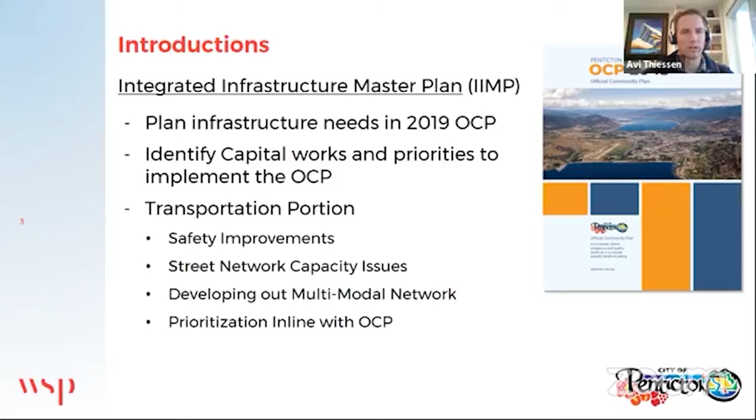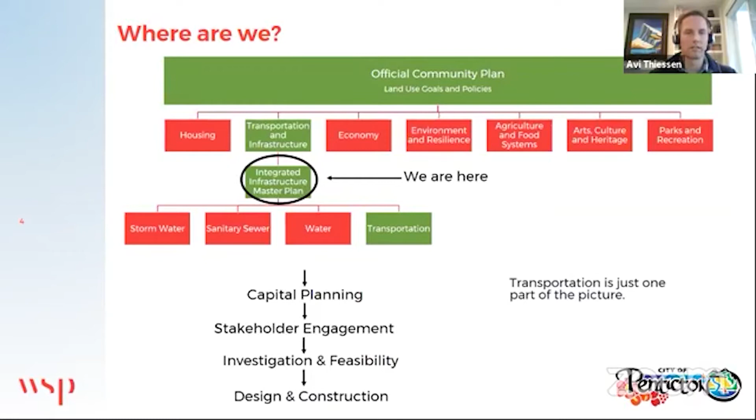For more context, the official community plan is the overarching document of how the city wants to grow. From that, several other documents or studies will be completed. This one is specifically focused on transportation infrastructure, and within that we have four main areas: stormwater (how we handle major rain events and snowmelts), sanitary sewers, water, and transportation. This program does not result in detailed designs with the nitty-gritty of what's going on—that's the next phase. You can see that in the lake-to-lake type project, where corridors are selected and then go out for additional public consultation. The intent of the Integrated Infrastructure Master Plan is largely to identify the list of works that are needed and to prioritize those works.

So again, the OCP really lays out where we want to go. As part of the integrated master plan, we've modeled all 4 of those systems - storm, sanitary, water, as well as transportation - to really understand where we are now. And then in 5, 10, 20, 25-year increments, we've also modeled out the future based on the growth laid out in the OCP, to see how that would look and what the infrastructure needs to do in order to meet that demand.

It's based on the need. Most of those works will be prioritized based on high, medium, low. The other thing that's important to note is that this is not necessarily a unique approach, but it's a good integration approach, where typically the storm, sanitary, and water are all looked at separately, meaning the prioritization isn't thought of in conjunction. The IIMP is really trying to pull them together and prioritize the capital works for the next 20, 25 years based on the OCP together.

So what we're doing today is sharing the overview of where we are today with capital projects, specifically focused on pedestrian, cycling, and street networks. And then we're going to talk about some public transit, goods movements, and parking. And then what we're asking for from the public is to provide input on the prioritization of the process and also to identify any outstanding issues.

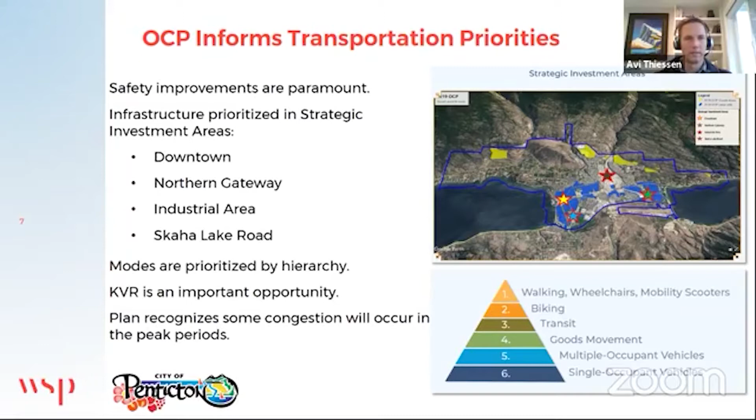So how this presentation is laid out: for each one of these areas - pedestrians, cycling, and vehicles - we're going to be looking at what we've heard to date, what the data says, how we're proposing to prioritize this work, and some of the high priority locations that have fallen out of that. Then we're also going to look at transit and goods movements.

So jumping into pedestrians. During the public engagement in August or the summer, the main issue identified was missing infrastructure. You can see here on the map on the right, the blue dots, that's all the missing infrastructure identified by the community. Conflicts with pedestrians - sorry, pedestrian conflicts with vehicles. Pedestrian facilities that require maintenance.

And then we also met with an advisory group in the early spring. From the advisory group, cyclists using the sidewalk in the downtown and lakeshore areas was identified as an issue. This often happens when cyclists don't feel safe to use the road, and they often will get up onto the sidewalk. Pedestrians crossing timing not accounting for elderly residents - or basically the signal timing out while people are still in the crosswalk. Unsafe pedestrian and cycling accommodations on rural roads, primarily the Naramata area as well as Lakeside Road.

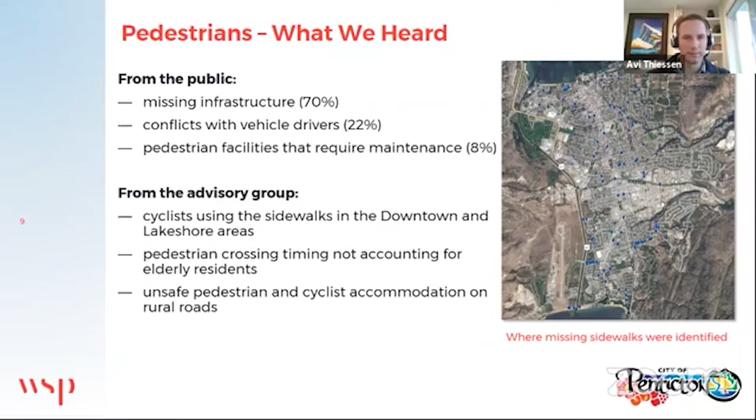So what we used as the backup or additional investigation: there's the subdivision bylaw, which calls for sidewalks at least on one side of the road. The sidewalk priority plan - the city already has a sidewalk priority plan, and this is actually a very well-developed plan. They've gone out and done a lot of investigation as to the missing gaps in the network. The Parks Recreation Plan - the idea there is to connect through parks with trails, but also to connect parks to lakes, mountains, and community destinations.

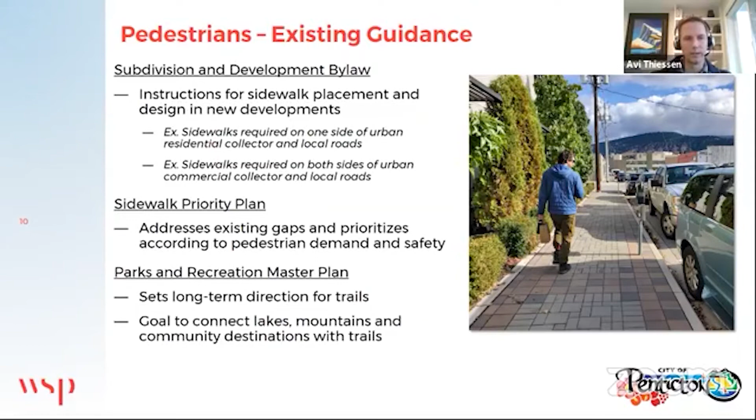How we are proposing to prioritize this work is locations that are pedestrian and vehicle collision hotspots, so that's primarily focusing on safety.

Proactive focus on infill growth areas. The OCP called for significant growth, specifically in the downtown. We want to make sure that those people can get around there safely.

Known pedestrian generators, so that's basically just places where people want to be and come from - parks, schools, shopping, employment, community centers, recreation centers, and transit.

Prioritizing vulnerable users, so sidewalks around senior centers, schools, and then anywhere that's a generator for mobility restricted people, such as hospitals. Gaps in the sidewalk network according to bylaw, so that's just anywhere there's a gap, specifically relating to development.

Roadway volumes, classification, percentage of heavy vehicles - essentially, the higher the volume of traffic on a road and the higher the volume of trucks on that road, the less safe pedestrians feel. And so we want to make sure that the pedestrians have a place to walk there. And then obviously also areas that just need to be replaced due to maintenance issues.

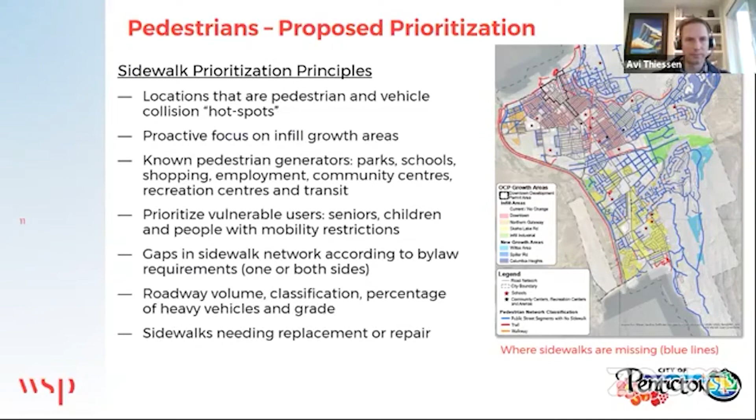Moving on to cyclists. Again, from the public engagement over the summer, lack of proper cycling infrastructure, mainly bike lanes and signals, was identified as the top priority.

Conflicts between cyclists and vehicles, traffic, speeding, conflicts with parked cars. And you can see again here on the map on the right, all the yellow dots are the locations where these types of issues were identified.

From the advisory group, the top issues were: establish Penticton as a cycling hub for tourism, add a bike facility on Lakeside Road, reevaluate the bike route on Carmi Ave versus Duncan Ave, improve bike parking at transit stops, add bike repair areas along Kettle Valley Rail Trail, and address regulations for micromobilities such as motorized scooters and e-bikes.

In the last several years, we've definitely seen an increase in e-bikes and motorized scooters. These are starting to go onto multi-use trails now, which is causing a bit of safety concern, particularly where there's a high volume of small children.

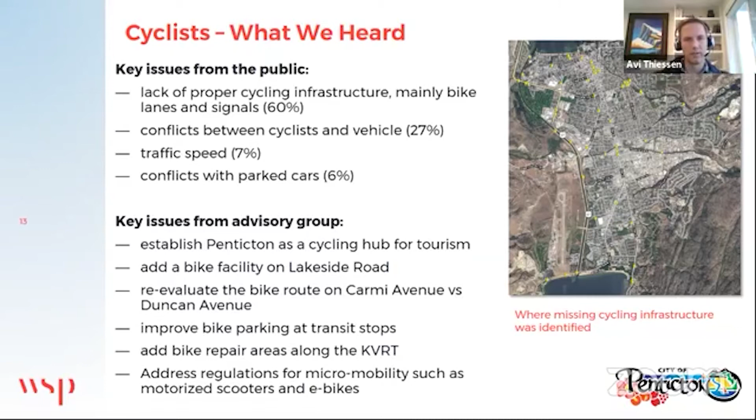So what were the documents that we used to guide this? Penticton in 2006 engaged in a transportation master plan. The cycling component of that was updated in 2012.

And this project kind of took the 2012 update and has continued to work on trying to build out the cycling network, as well as bringing it up to Ministry of Transportation standards. And the lake-to-lake cycling route was identified as a high priority, which is already underway.

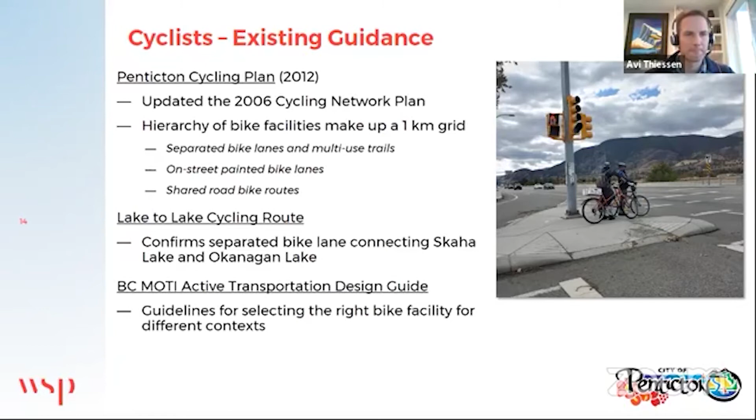So how was cycling priority proposed? Update using the active transportation mode guides from the ministry. Prioritized cycling infrastructure that improves and addresses safety.

Construct routes that connect to key destinations in the infill growth areas such as schools, Okanagan College, employment centers, major retail, downtown, parks, and beaches. Construct the lake-to-lake bike route, which again is already underway. Improve street connections to major trails.

And you can see here, this is the bike network that is proposed, and some of those routes are already completed.

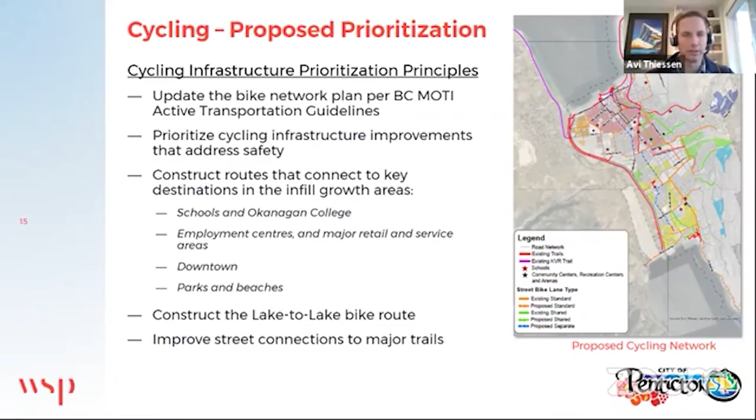So when it comes to streets and traffic safety specifically, what we heard from the public during the public engagement is that there are a number of inadequate or unsafe intersections. Speeding was highlighted as an issue. Sight lines and blind corners were identified. Pedestrian vehicle conflicts with parked cars, issues around driveways on busy roads, and traffic congestion.

Again, the map on the right - all the red dots are the locations that were identified by the community as potential issues. From the advisory group, we heard that speeding was an issue, need for safe pedestrian crossings on collectors, sightline issues specifically on Smythe Drive, and desire for traffic calming on Lakeside Road.

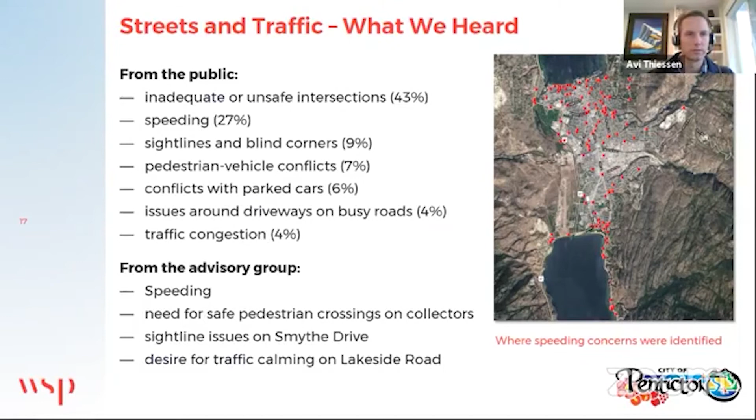So what we use as our background data is a data set from ICBC, 2014 to 2018 collisions over that period. You can see here on the map on the right, in dark gray, the higher frequency collision locations where there's more than 8 during that 4-year period. The lighter gray is where there's less than 8 collisions in those locations.

As part of this data set, we also overlaid all the locations that were identified by the community. There were 2 kind of major areas identified as safety issues from a collision perspective.

One was the highway, where there were 2 main collision types. One is the right-hand turning vehicle, where people are typically entering onto the highway, looking left to find a gap in traffic, and end up rear-ending the vehicle in front of them who hasn't proceeded forward. The more serious issue collisions are the ones where they're turning left and colliding with through vehicles in head-on collisions.

The other corridor that had a number of collisions along it was Main Street, Martin Street, and Winnipeg Street. That's the major north-south arterial connector.

What we saw on this road was that there was actually quite a bit of red light running and people misjudging the oncoming traffic gaps, as well as not really understanding what people were doing when it came to their intentions with regards to turning. That's people not signaling while turning left or right, and the person behind them hitting them, or an oncoming accident.

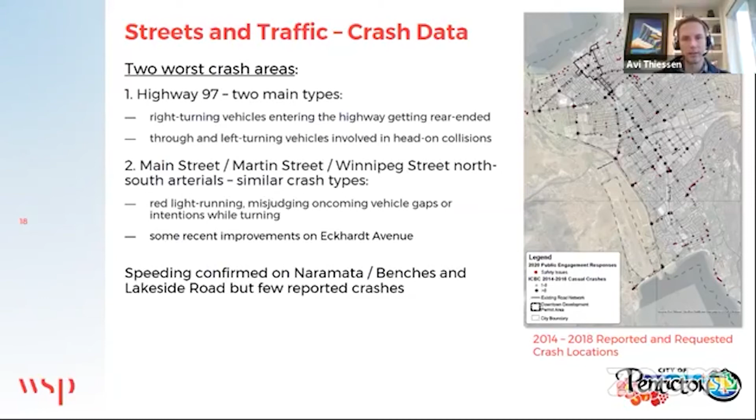With regards to capacity issues, the model looked at 144 intersections. Based on the current 2020 volumes, there are 15 intersections that need improvements. When we projected that out to 2045, there's an additional 27 intersections that need improvement. A lot of these are reasonably minor, such as increasing capacity at the left-hand turn or signalization changes.

This does not take into account any mode shift. What I mean by mode shift is part of the OCP's plan for the community of Penticton is to get more people onto bikes and more people onto transit. Sometimes when we do this in communities where there's a lot of ridership on buses or a lot of bikes, we can look at a continued trend in the modeling.

This is kind of the worst case scenario, where the same number of people who are currently driving continue to drive on the network, and we just use background growth for that.

So how do we prioritize capital projects? Our main concern here is safety, so any project that has a safety concern would be the highest priority. Sidewalk and cycling projects would then be prioritized, as well as other infrastructure, so coordination with the storm, sanitary, and water projects.

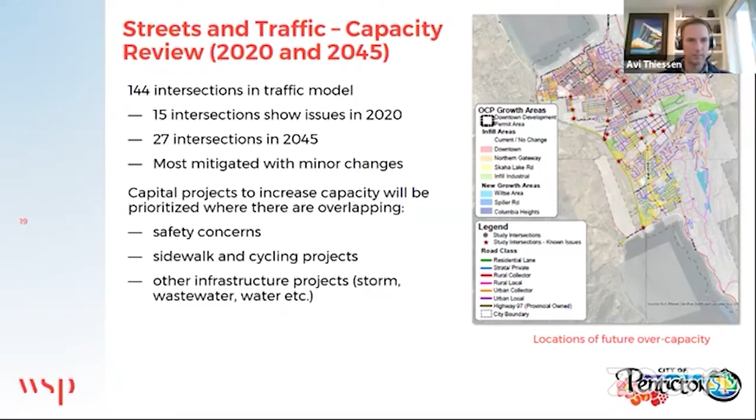So here's the list of the short-term capacity locations, meaning locations which have capacity issues over the next 5 to 10 years.

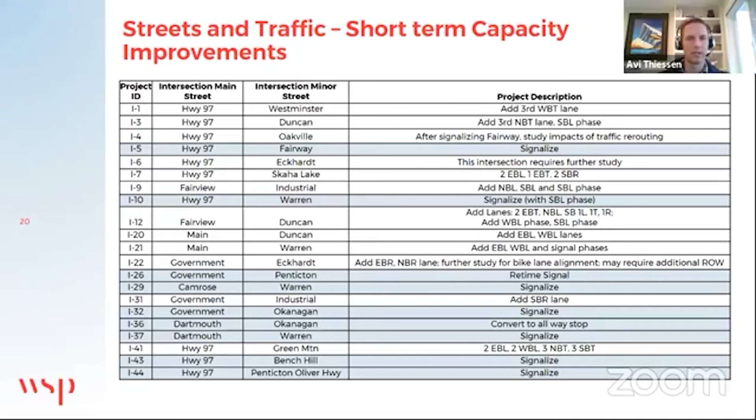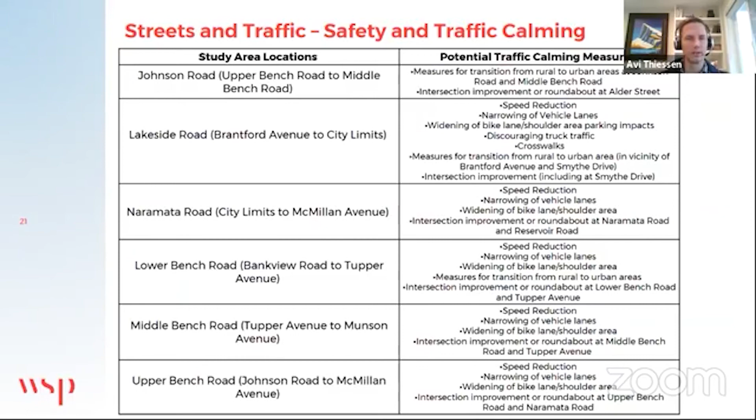We also looked at safety and traffic calming. This part of the work is not done yet, but on the left-hand side here you can see the study areas that are currently being focused on, and on the right, the potential calming measures. These are not recommended at this time, they're simply what we're looking at doing to see if that would have any improvement overall.

So, public transit, goods movement, and parking. Unfortunately, Transit had been planning to update their transit future study, originally from 2015. That got postponed due to COVID and only restarted late this fall, so we were not able to coordinate this project with that work. However, that will be done once that work is completed and handed off between BC Transit and the City of Penticton.

For goods movement, the existing 3 classifications of truck routes in the city is a little bit confusing, I think, for truckers.

Our recommendations in the report are going to be to simplify that, and we're going to be recommending some best practices to hopefully give a little bit more clarity to truckers, as well as make it easier for enforcement.

With regards to parking, we did go through all the existing data. Council did recently look at this and approve a parking rate increase in downtown paid parking areas, as well as potentially looking at some paid parking for residential areas.

As this is new, and collecting data during COVID was probably not a good situation and would not give us good data, the recommendation is to move forward with a more comprehensive study, especially once the results of increasing the cost of parking downtown are understood.

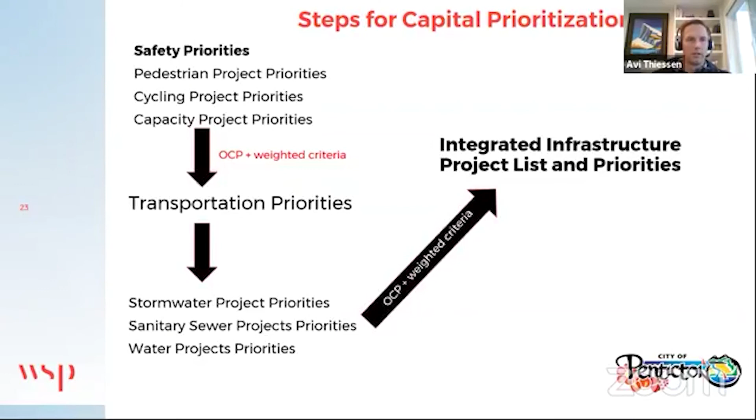So the next steps are to incorporate feedback, finalize the capital project list and priorities, and finalize our report. I think with that, Joanne, I don't know if you want me to hand it back to you.

Actually, just keep your screen up, Avi, in case you want to refer to any slides there.

Sure. So one of the hot topics we've had in the community, and that was referenced on our Facebook Live, is this idea of having a parkade downtown. I know you mentioned a recommendation for more parking studies—do you have any comments on that question?

Erin, would you be able to comment on that?

Sure thing. We referenced a background report provided by the city which looked at the feasibility of a parkade downtown. From a cost perspective, it looked like there were still questions on the table after that report was completed. So that was part of what led us to recommend a further comprehensive look at parking in Penticton, and within that comprehensive look, really identifying what the goals for parking downtown are, and using that to structure an analysis of whether a parkade would be desirable or feasible.